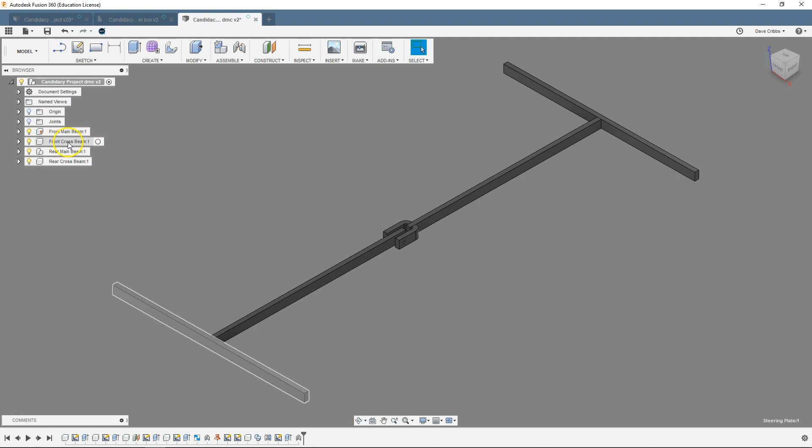First thing we're going to do is work on the wheel boxes. I need some holes in this front crossbeam for those wheel boxes to pivot on. So I'll come here and activate that component, and I can just go ahead and sketch right on that top face.

I want the center line, so I'll do the same trick. I'll slide down until I get the triangle, that's the midpoint, and come out at a certain distance. I'm going to turn that into a construction line. I'll do the letter C for a circle, put that on there, make that 0.5.

I'm going to pull that dimension out so it's a little easier to see. We'll also dimension this distance from the edge here to that circle. We'll say 1.5 inches, that'll have enough metal on the end of this to make it strong enough. Maybe we'll go... we'll call it 1 inch. We'll see how that works out. If we need to change it, we can.

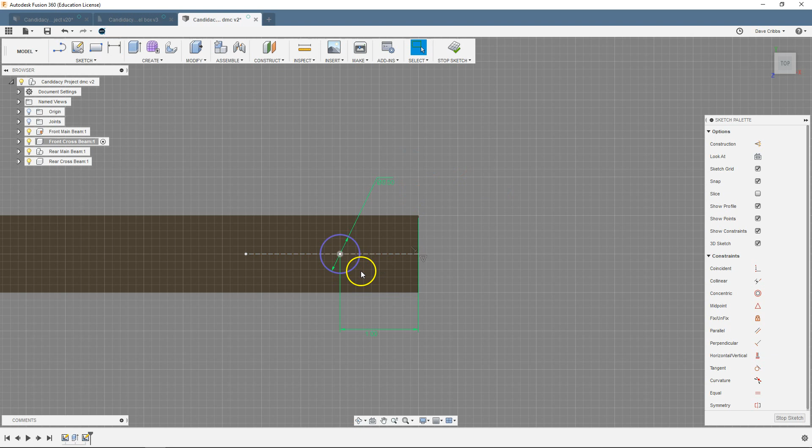So now that I've got that hole, everything is good there. We'll stop that sketch.

Select that profile, we can press... grab the wrong one, select press pull. I'm going to go down so it'll cut. I can go ahead for the distance, select face. I want the face behind this one, so if I hold down my left mouse button I can select this face or the bottom face. Okay, so we can cut that.

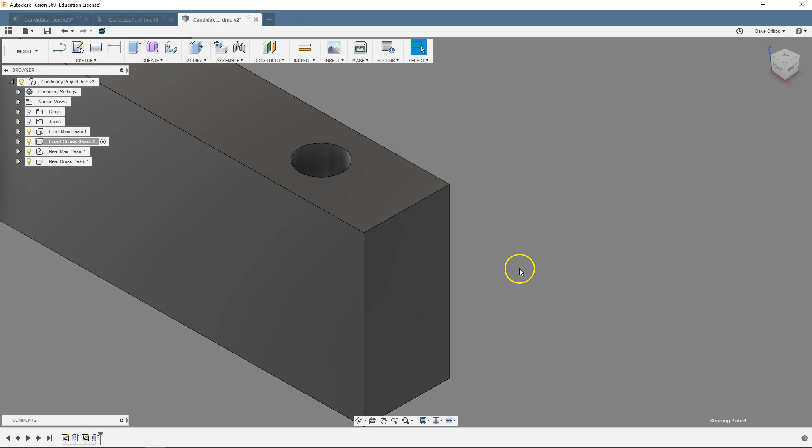Now that I've got that hole, I think this will be a great use of the mirror tool. So we'll pull that up. I don't want a face, I want the feature. I can grab it from down here in the timeline. And since I've obeyed rule number 1 and everything is nice in their folders, the timeline for this front crossbeam

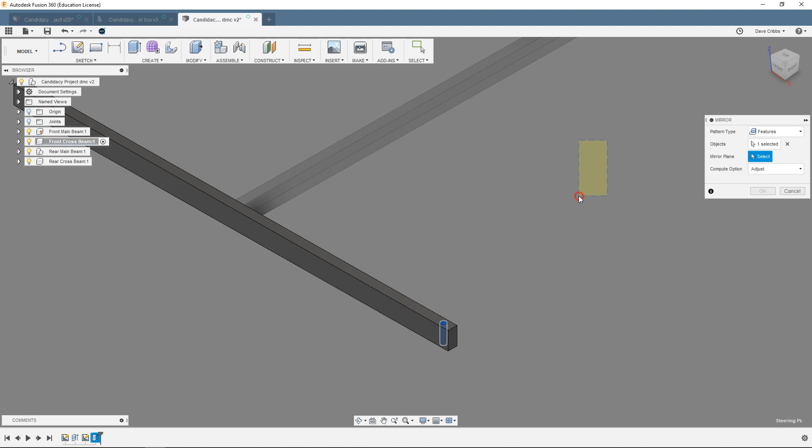is really easy to find what I need. The mirror plane will be the center plane right here. So now I can see I got my other hole right over there. So now I've got the holes for the wheel boxes to pivot in.

So we'll come back up here. I'm going to right click, do a new component, we'll call this our wheel box. And unlike the other component, when I did rear main beam, this is an assembly that's got more than one component in it. This one's got a body. This was its own component, and then I added another one. So that's why this is an assembly.

For the wheel box, I'm not going to actually make any geometry in there. I'm going to come right here, right click again, and do another new component. And now it's going to nest component 7 under the wheel box. The wheel box doesn't have any bodies, so there's nothing actually associated with the wheel box component. These other parts will be.

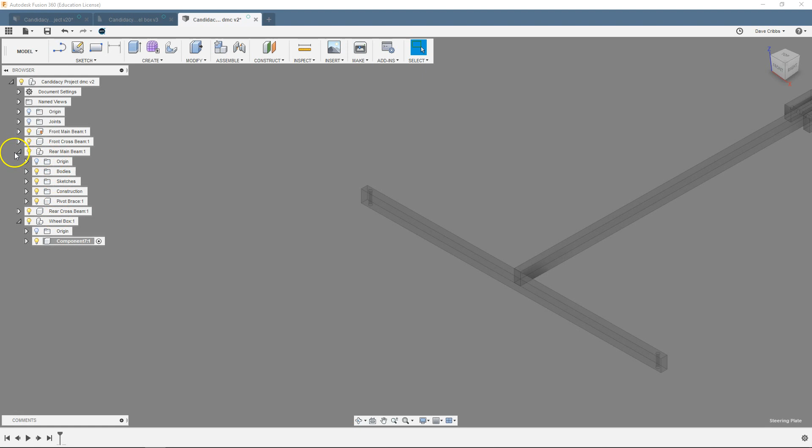Okay, so I've designed several of these pieces in place. I was real careful to put them exactly where I wanted them so I could do the as-built joint. But this time I'm just going to go ahead and design wherever the heck I feel like it. So I'm going to go ahead and sketch.

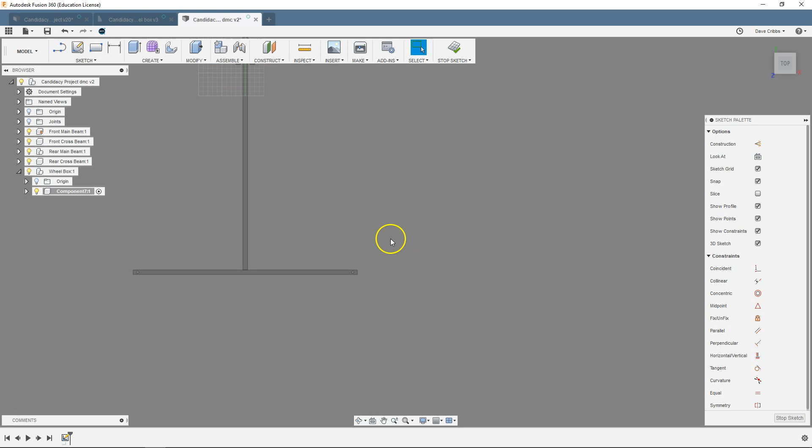I'll grab this plane right here, and I'll put the wheel box close to being out here, but I'm not really going to worry about getting too close. I'm going to sketch a 2-point rectangle, it doesn't have to be attached to anything. It's going to be 2 inches, I think I did about 4.5 inches last time. And once again, this isn't defined as any location, so that's why those lines are still purple.

I am going to want to put a hole in this, so I'll do this to find the midpoint. This time I'll just come all the way across, right click, and make that a construction line. I'll do C for circle, it's one of the few shortcuts I know. 0.5 for that circle, and place it.

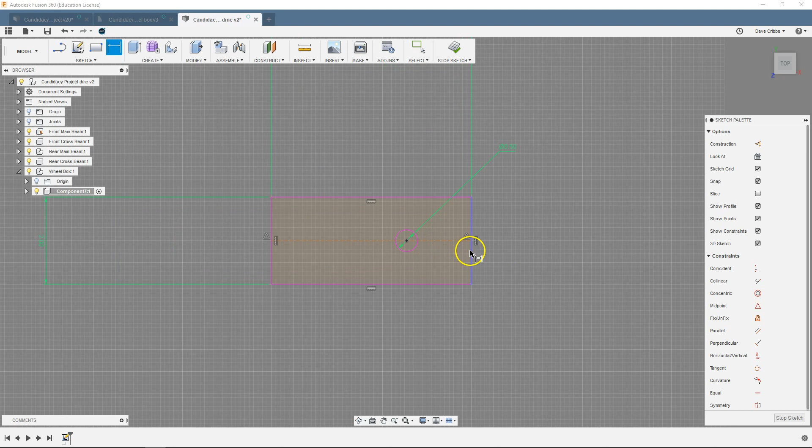And then we'll also add a dimension in from this edge. For the wheel box, we'll go ahead and call that 2 inches. Let me actually look at my drawing.

I have it as 2 inches by 4.5. You don't have to worry about drawings right now, this is just for me. I had 1.5 inches in.

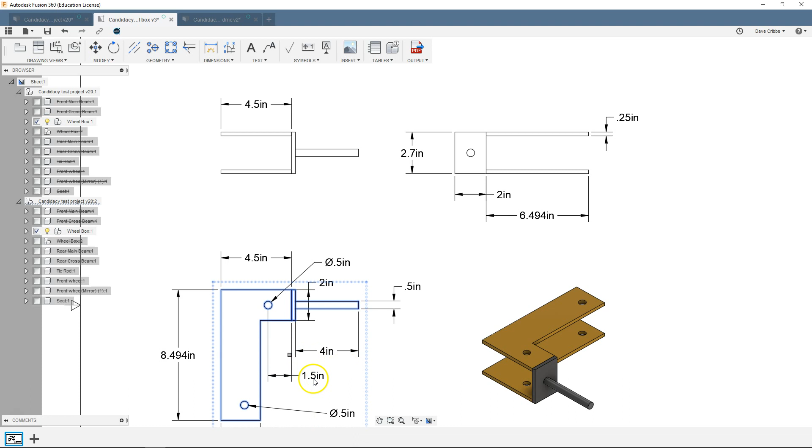I'll post these drawings online so you can get the same dimensions. So let me go back here, and it's just easy enough to change that to 1.5. So we'll go ahead and stop that sketch.

Go back to perspective view, right click, and we'll make that just a quarter inch thick. On the other drawing I had this big long back plate on it. If you look at both of these, the bottom part of this one is connected to our tie rod. This top one, you don't really need that, so I'll just make it that nice little rectangle.

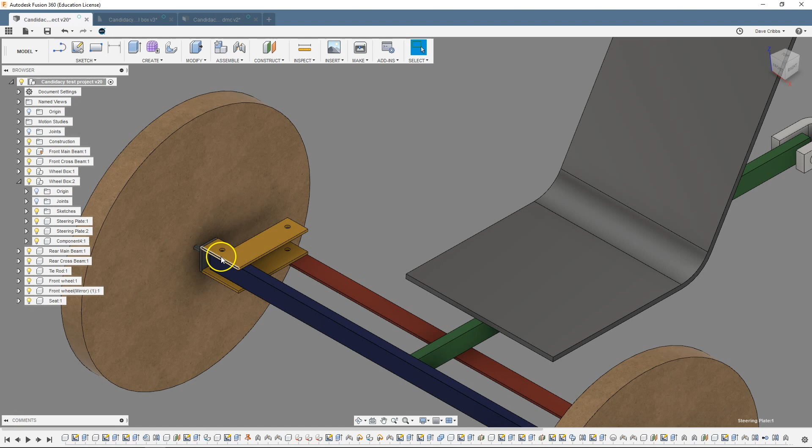Okay, so that's one part. I need the other front part. So this will be the top plate. So we'll go ahead and name that top plate.

Go back up to the wheel box. I'm going to create a new component. And this will be the end plate and shaft that our tire will sit on, or our wheel.

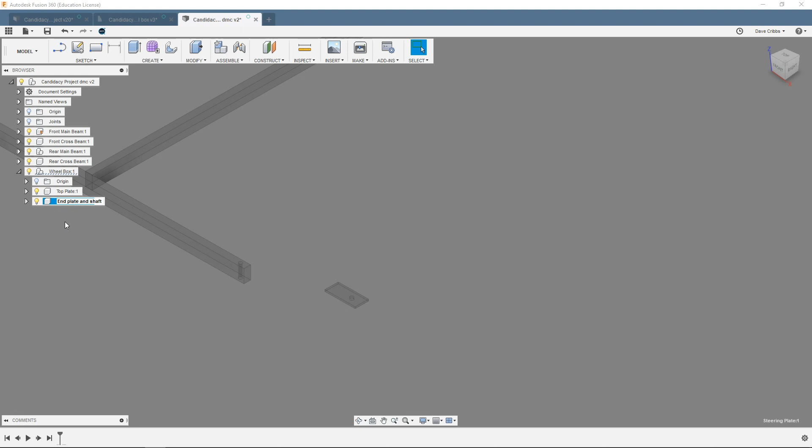Okay, so I can sketch that. I do know I want it on the right hand plane, so I'll come out here, select this plane. Same thing, I'll sketch this as a 2-point rectangle.

Let me come back to my drawing. That end plate was 2 inches by 2.7. And this will be a good example, I'm going to change that. We'll leave this. Let me dimension this.

That's 2 inches. I'm going to do this. That's 2.5. And I'll explain why I did that here in a second.

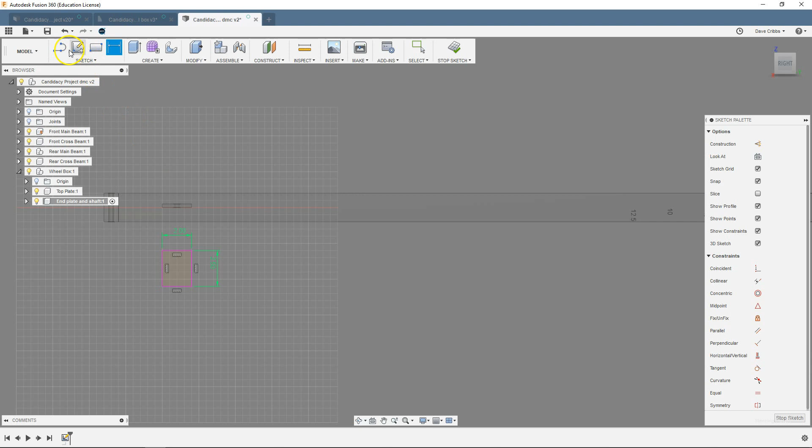I also need to put, I'm going to put a center line on here. Not just here in the vertical, but I'll also put a center line on the horizontal. And that's where I'm going to make sure that my axis of my shaft goes. I'm going to turn this into a normal line and this into a construction line, not a normal line.

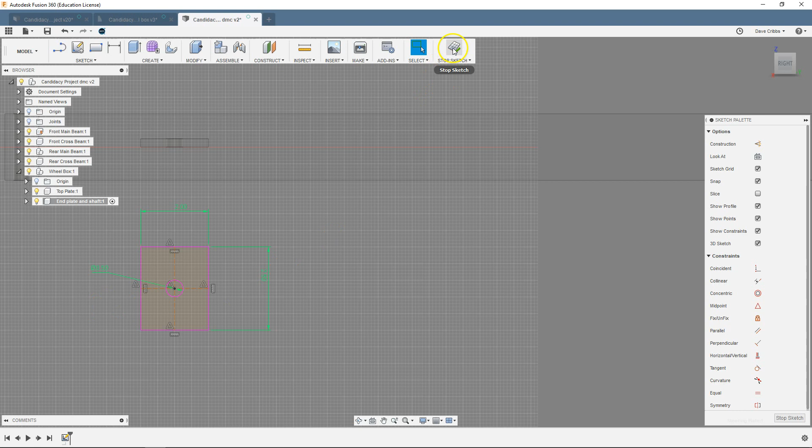So I'll do C for circle, put it right there at the center, and we'll say a 0.5 inch shaft. Okay, so that should be the geometry I need for the end plate. So we'll stop that sketch.

Come back over here, and this is kind of an odd place. I'm going to turn off the front crossbeam, just so it's not in my way.

I'm going to extrude this and the center part. So I'll open up the extrude command, get both of those. We'll pull out 0.25. I still need that sketch, so I'm going to turn it back on. Left click, and I can grab that profile.

I'm going to right click and press pull. I want that to be, I don't want to cut, I want to join. And our wheels are pretty thick, so we'll go ahead and make this...

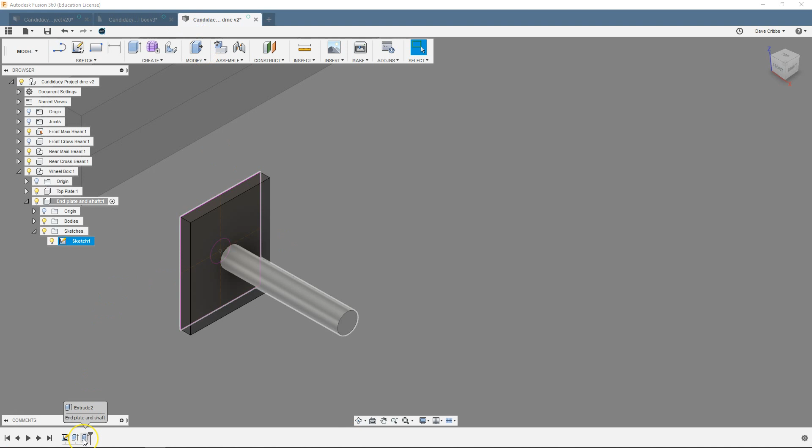I don't know, let me see what I did over here. I did it 6.5 inches. So we'll go ahead, oops, I already did it for me. We'll edit that, I want this to be 6.5 inches. Okay, so I can turn off that sketch.

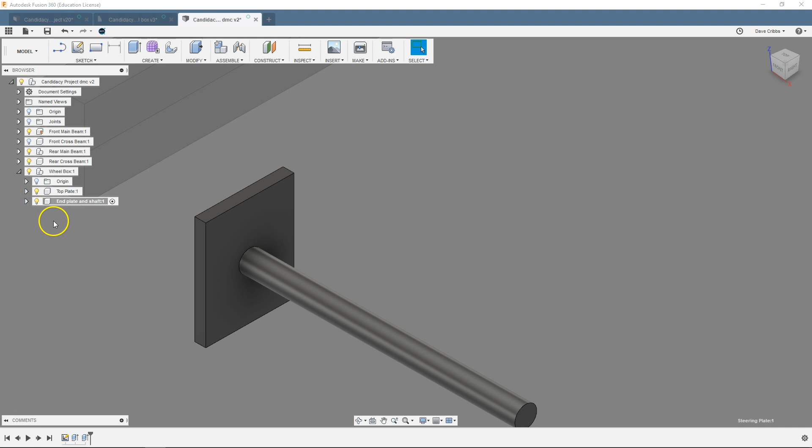So this is all one body, but it's under the end plate and shaft. So that should be good. Okay, so now that we've got the end plate and shaft completed, now we can go ahead and make the bottom plate.

So I will need to activate this component, do a new component in there, call this the bottom plate. Same thing, we'll sketch. The bottom plate's going to be on this same plane.

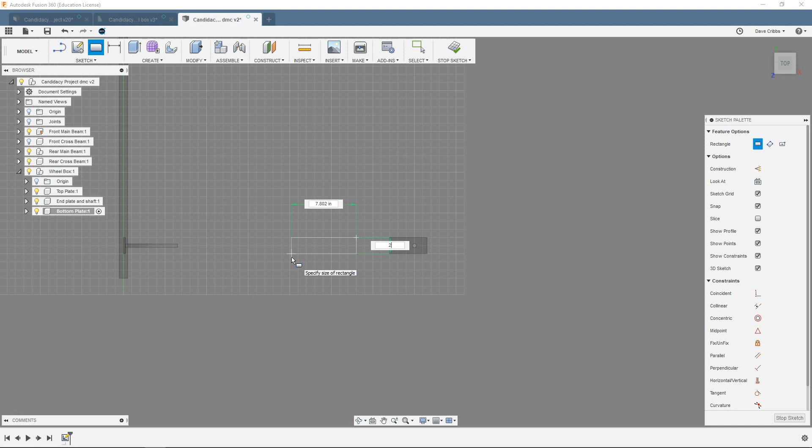I'll just do a little close by. So this time, we can do this. Let's go ahead, we'll do the same 2-inch by 4.5 rectangle.

But then not only do we have this 2-inch by 4.5, but we got another 8.5 by 2.5 hanging off this end. So I'll go ahead and I'll make another rectangle on this corner.

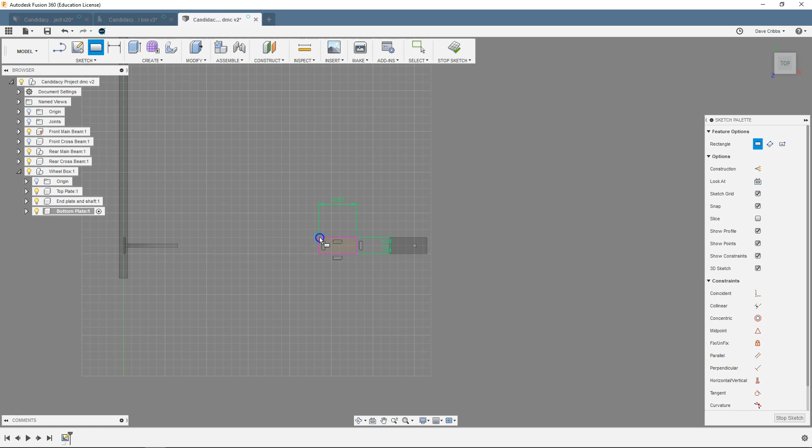So that was 2.5, and if it's 8.5, and I've already got 2, so that'd be 6.5. Place that.

I've got dimensions all over the place. I kind of move these a little bit. Move the dimensions. Okay, so I've got 2 rectangles.

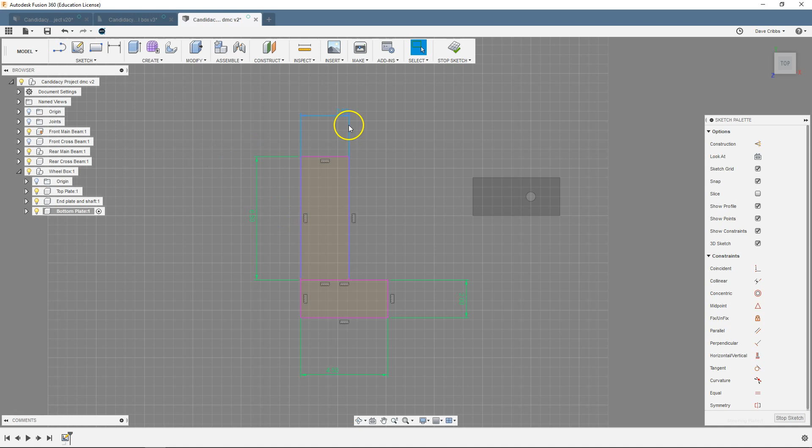I can just leave that. I can come in here to my sketch tools and grab trim and delete that line so that's just one continual space. I'm going to leave them as rectangles because if I need to come in and change the geometry, I'd rather have them as rectangles so I can adjust that.

I'm going to put my midpoint line once again right here, so my circle's in the middle of that plate. Change that to a construction line. I'll do another midpoint line on here.

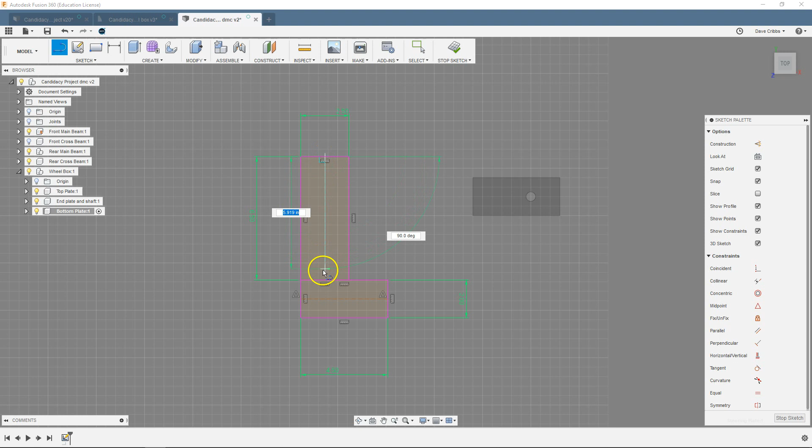Change that to a construction line. We'll need a couple circles. We'll need a 0.5 circle there. We'll need a 0.5 circle. Need a 0.5 circle on this piece as well. Put it.

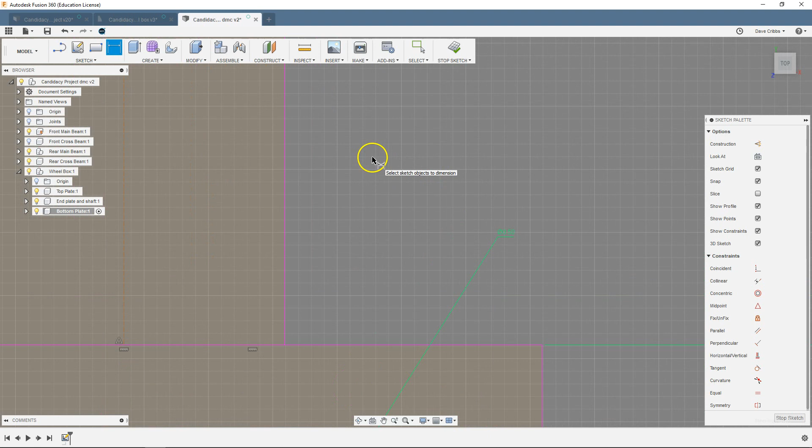Fusion likes to be difficult sometimes. You just gotta hang in there. Okay, so that's a 0.5. We'll move this guy here so I can see that.

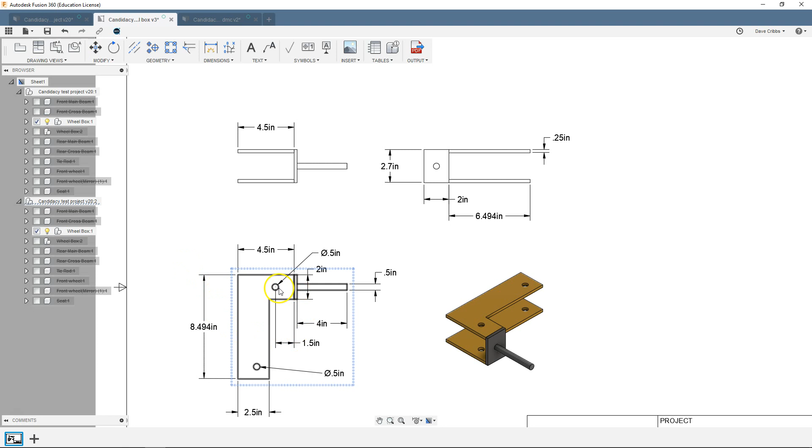Same thing, we'll dimension from this end out to where the hole is. Put 1.5, I can't remember what it was. I go back to my drawing. Oh, 1.5 from the end. Lucky me. And then this guy, I didn't have a dimension on this one. We'll leave this guy without a dimension right now. That's going to come into play with our Ackermann steering.

Okay, so that should be good. We'll stop that sketch. Come back to the isometric view. Go ahead and start my extrude command. Grab this one and this one. We'll go at 0.25. We'll make our plate.

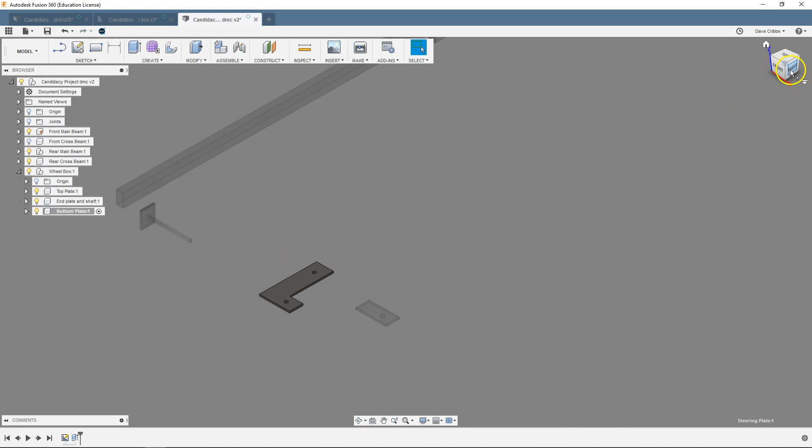Okay, so I can come around. I'm going to do this. I'm going to move these a little bit closer so we can kind of see what we're talking about. That's the big one, so that's the bottom plate, and this is the smaller one. So that's the top plate.

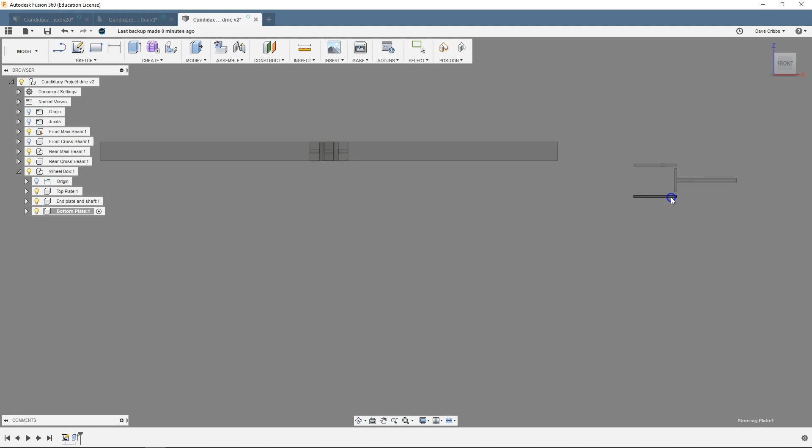I'm going to change my view to the front. Slide that over here. Slide that over there. Go back the other way. Okay. So when I look at this part, I can go back here to the wheel box, activate all of it. And we can see all these parts.

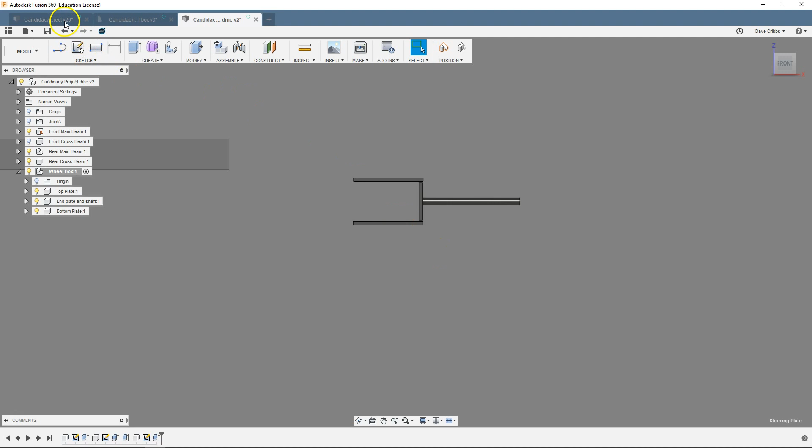And the question is, when I design this, when I actually build this, do I want to assemble it with this top plate and the bottom plate fabricated like that, or do I want to put the top plate on top and the bottom plate on bottom? And it turns out this is going to be the case that I want to do it. In my original drawing, my original design, you can see that I've got the top and bottom plates coming off the ends. They're kind of sideways. This top face is open.

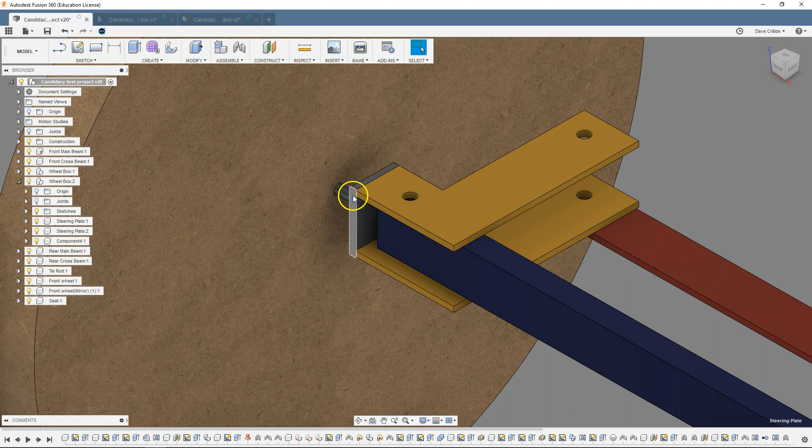And that's actually going to be a weaker joint. We'll have to weld that together, and then the entire weight of the wheel is going to be on that weld. And our welds are not always perfect, so we want to help ourselves out as much as we can. So if I design it this way, then just the actual physical location of these two pieces, the load can be transferred into that just because of the position, and the weld will hold it where it is, but the weld doesn't have to hold all the weight.

So when I join these things together, I want to join it in this position rather than like that. That will be weaker, and that will be stronger. So we'll go ahead, come back here. I'm going to go ahead and capture position. If I go back to revert, it'll put these things back all over the place. So I'll capture the position.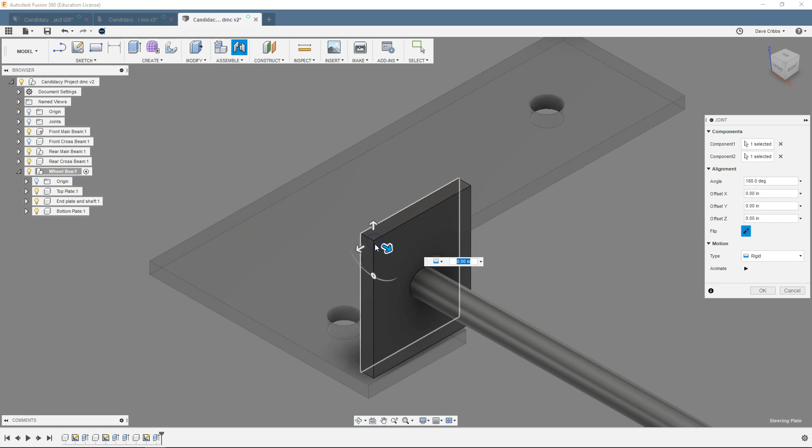Now I can do the joints. And since I kind of put them close to each other, I'm going to hold down Control, grab that bottom corner, hold down Control, grab that top corner. I want those to be rigid, and I want to flip that. Okay. And then same thing.

I'm going to right click. It's called a context menu. I'm going to right click and drag straight up and go to repeat joint. I don't have to go get the command. So I'm going to grab this corner and Control, grab that front corner, flip it again, and those are good.

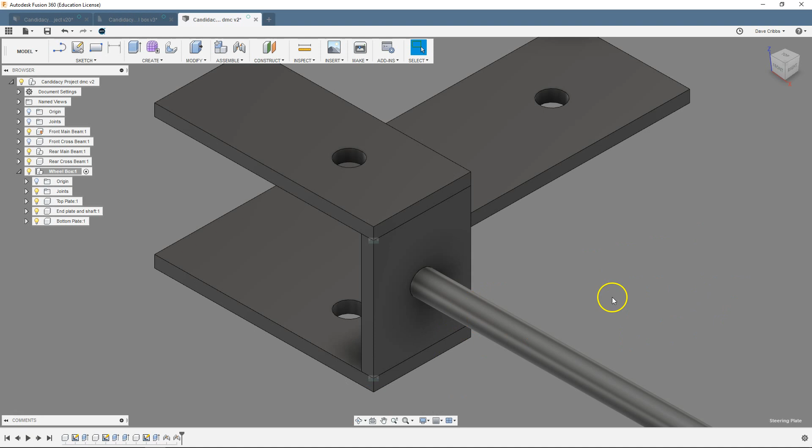So now I've joined together all parts of that wheel box, and we got a completed wheel box. That should be good. We'll see. So now I can go to fit, turn back on my front crossbeam. Panicked there for a second, couldn't find it.

And now let's go ahead. We're going to need another one of these. I'm going to turn off my joints. We need another one of these for the other side. So I'm going to select this entire...

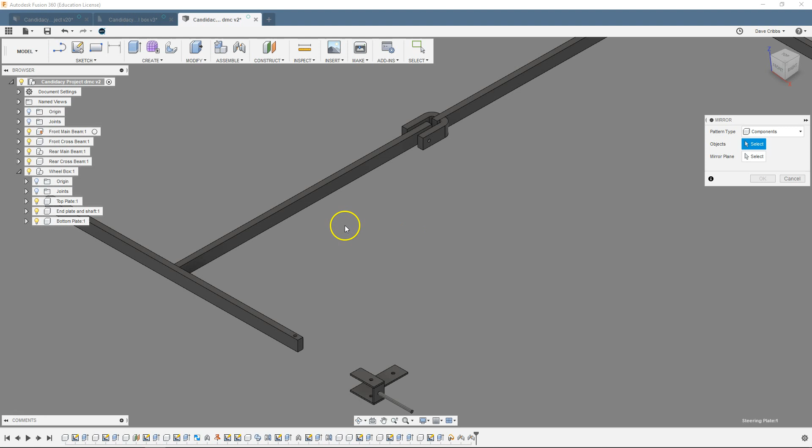Let me see if it'll let me mirror it. I'm not sure. Create a mirror. See, this just says features, components. I don't know if I can do an assembly. We'll see if it lets me mirror a whole assembly. Oh, there you go. Well, that was easy.

Okay, so that's the other assembly. That looks the way that I want it to. So we'll select OK. And great, so I've got wheel box 1 over here on the right hand side, and I got wheel box 2 as a mirror over there on the left hand side. If I expand this, it's got my components inside of there.

That worked out fantastic. Since I joined this wheel box, the joints are in this folder rather than my main folder, so it makes it a little bit cleaner. Now I can go ahead with the main level activated, so I'm going to go ahead and assemble these joints. Oop, here we go.

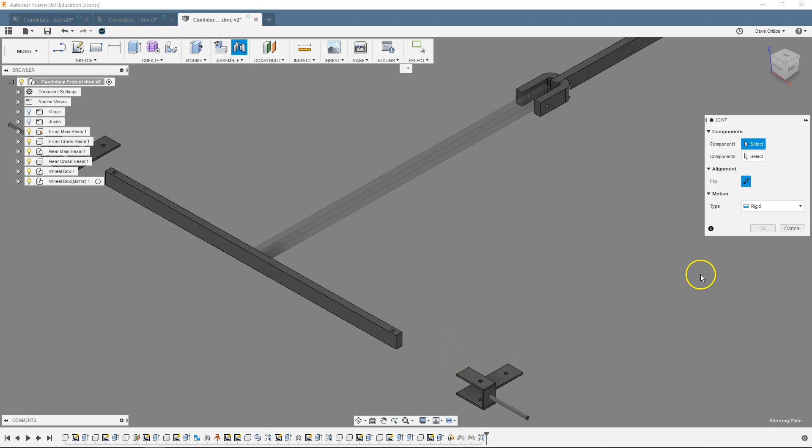We're going to get stuck again. I want to put a revolute joint in here. If I select the center of this, and come back out here and select, I can hit Control and grab the bottom corner. It'll make a really nice revolute joint. It'll look great. We'll say OK, and go back to fit.

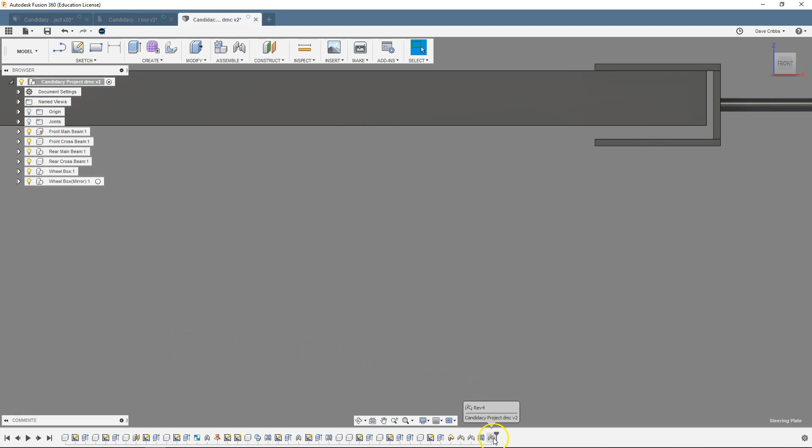But the problem is when I look at this joint, there's no longer that 0.1 gap. I need to have this scooted up a little bit, so we'll go ahead and change that joint. The way we fix that joint, we'll come down here and edit the joint, and we've got the option of doing an offset in the X, Y, or Z. So in the Z direction, we'll just move it up by 0.1, and hit OK.

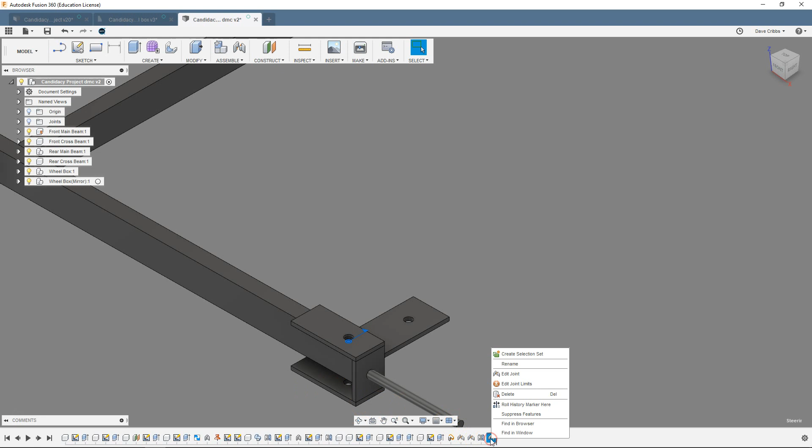And nothing happened. Let me see. Edit joint. Oh, so I moved the beam up 0.1. So then I'll change that to negative 0.1, move the beam down. So now if we take a look at that...

There you go. So I've got that 0.1 gap, and now this is too big. So this frame should be 2 inches tall, and then 0.1, and 0.1 should be 2.2. So the height of this should be 2.2.

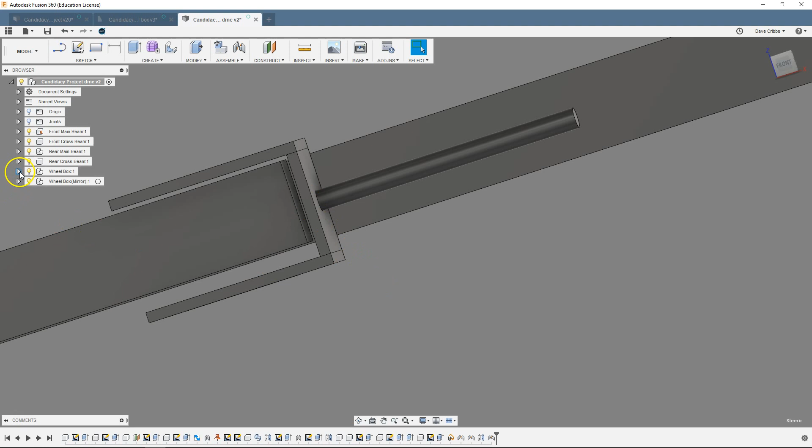So we can come back in here to our wheel box, come in here to the end plate, come in here to the sketch where I designed it. We'll edit that sketch. And I called it 2.5, and it should have been 2.2.

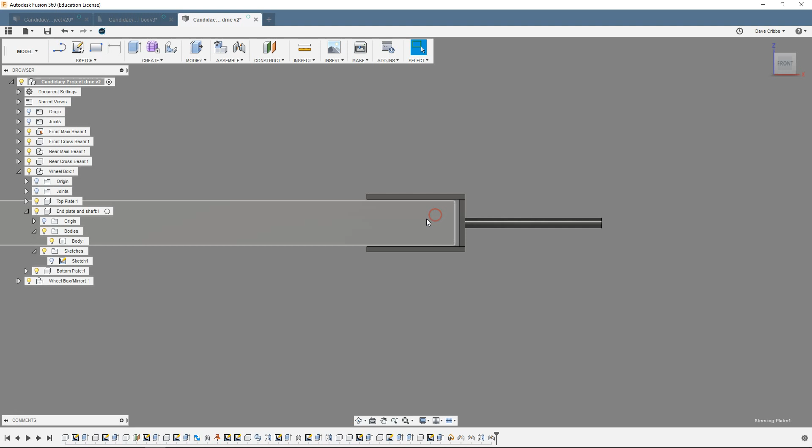So hopefully with the magic of Fusion, when I come in here to look at this... there we go. I'll go back to the front side and zoom in. There you go. So I changed this to the correct height. Now I've got a 0.1 gap on top and a 0.1 gap on the bottom.

So that wheel box is jointed correctly. I can grab it, and it's going to pivot. That's excellent. I'm going to go back here and revert that one.

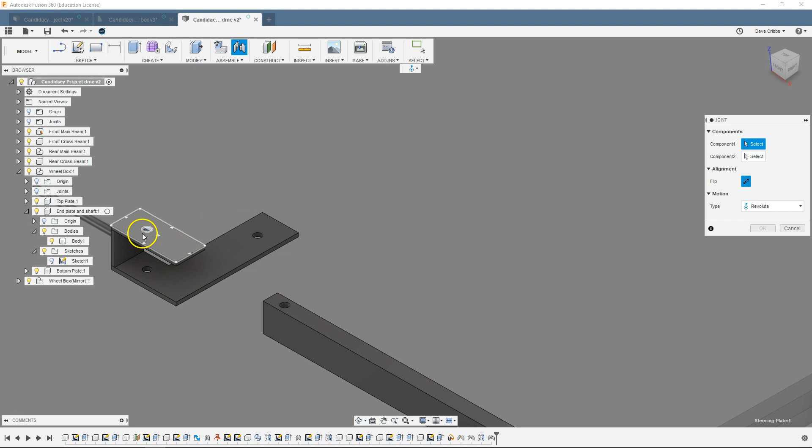I'll come over here to this one, and I'll joint this one as well. So select the joint command, come in here and grab this, hit Control to grab the bottom. Come over here, hit Control and grab the top.

And I want to scoot this one. The first thing you select moves to the second, so this one I'll need to move up this one, 0.1. That's that Z offset again. Oop, and I forgot to...

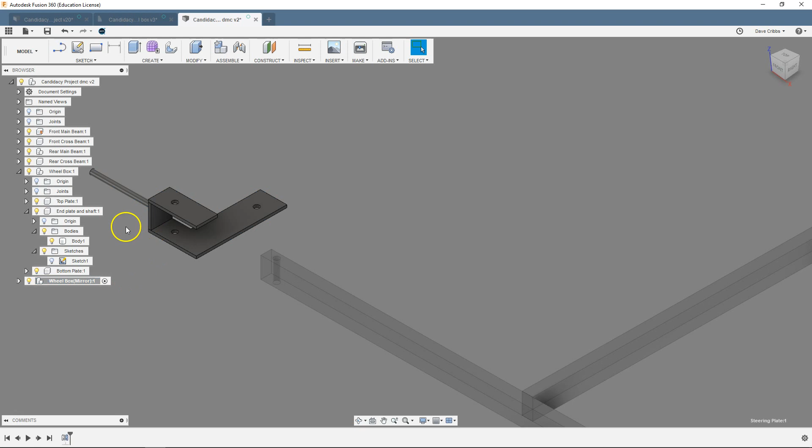So I copied the wheel box, but it did not copy the joints, so we'll have to undo that joint. So all the things in wheel box number 2, the mirror, are not jointed together. We'll go ahead and do that real quick.

So I can go ahead, we'll do this since they're all in the right positions. I'll create a rigid group where I just select 1, 2, 3. Hit OK, and now they are all locked together. Put this back in position. So that's a little bit faster than even jointing it or doing the joint in place.

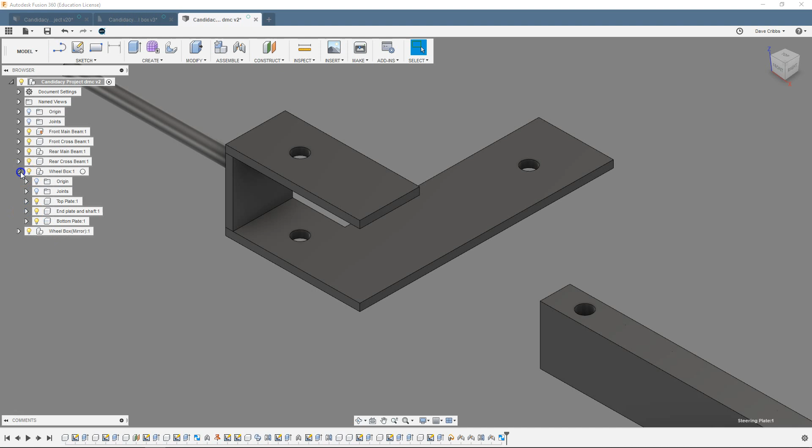So now for this, I'll go back up to my main level. Let me close some of these things out of the way so they're not in my... way. So we'll do a joint. I want to do the revolute. I want to grab the bottom of this.

Bottom of that plate, top of this beam. I'm still going to do the Z-axis offset of 0.1. Okay, so now it's over there. And if I move this bar, that moves.

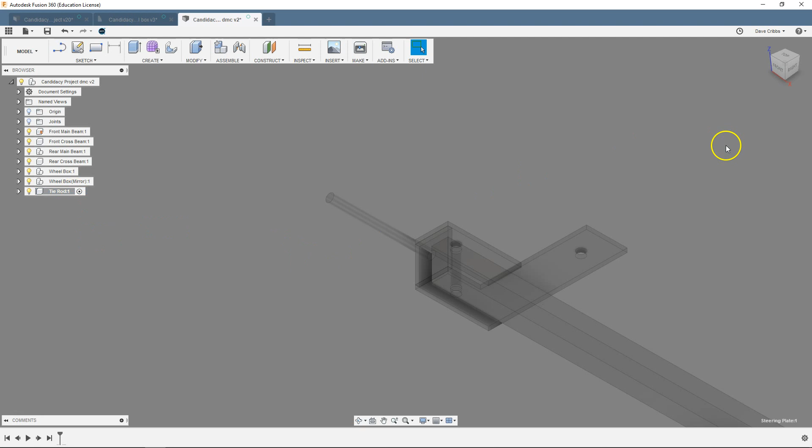Okay, so the last thing I need to do is put the tie rod in. I'm just going to use a flat plate to do that, just because it's going to be easier. So I'll put the flat plate on top of these things. So I'll just use, I should go ahead, I should, instead of sketching right on here, I should move it up a little bit.

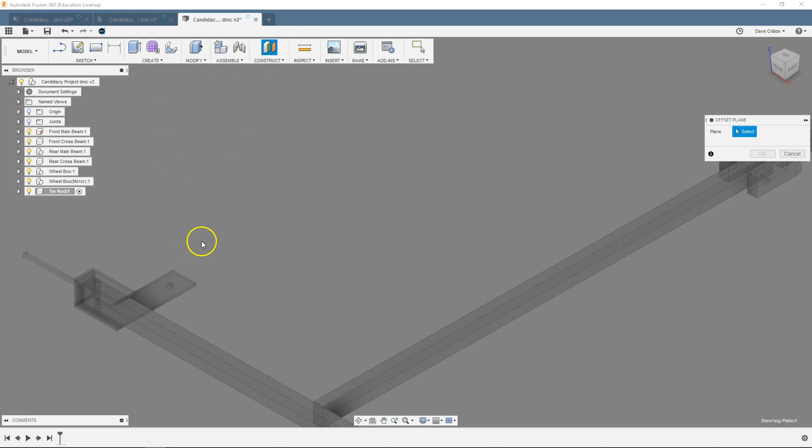So same thing, we'll do that offset plane from that top face, we'll come up 0.1 again. Okay, and I can sketch on that plane. And this time I'm going to sketch right on top of my geometry. I'm going to go from here all the way over, and we'll use a 2-inch height, and then we'll leave that 45. Make sure it's on the line. There you go.

I put these holes in here, but I'm not going to attach those to those holes just yet. We'll talk about why here in just a second.

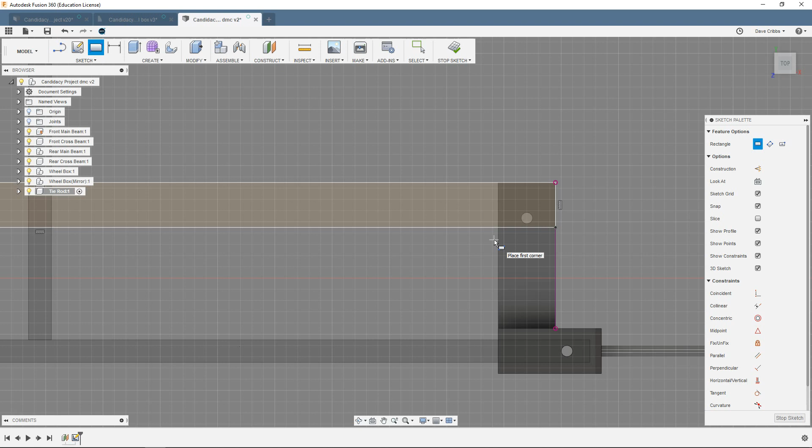I will stop this sketch, go to my isometric. This is on top, so I'm going to press pull this and we'll move it up 1/4 of an inch. So that's the last part of my steering assembly.

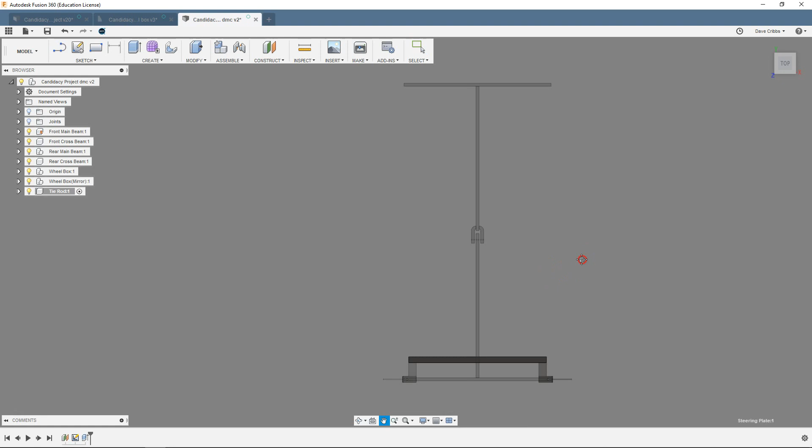I need to link these together. But the idea behind the Ackermann steering, which is one of the reasons why we're talking about this, is that when I move - you can go back to the one I've completed - that when I move this wheel assembly, when I move that tie rod, the inside wheel moves more than the other.

So this is the kingpin, that's what would go in this hole, to this axle. The line made by these 2 points, for the easy way to do Ackermann steering, that line needs to meet right back here at the center of that axle. So that's what's going to determine where that circle goes.

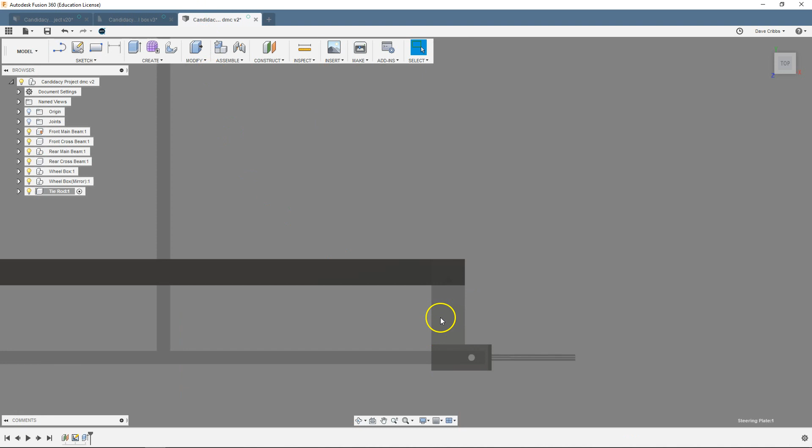So on ours, I've got a circle in here on that piece below it, but I'm going to need to adjust that circle. I think I'm actually going to double click this, and I'm going to move this. I changed my mind.

I do want this underneath, so I'm going to move it down. I'm going to move it down -0.1 from the sketch plane, move it down 1/4 inch for the thickness of the other flange, and then another -0.1.

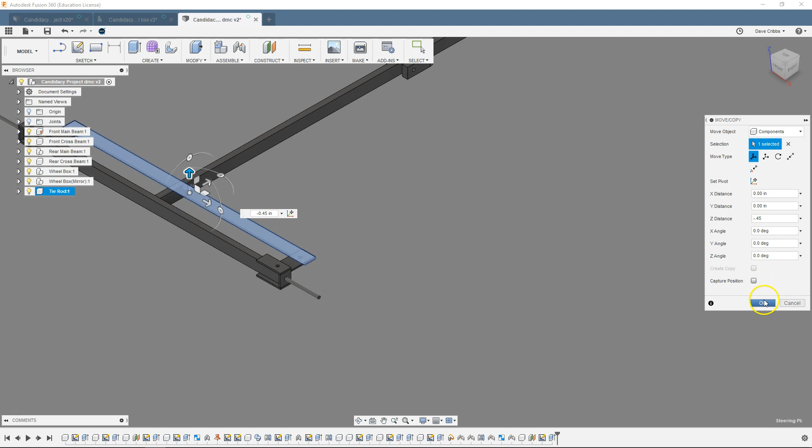So if I'm lucky, that should be -0.45, and that should be the correct position. So instead of being 0.1 above it - nope, I was wrong. Okay.

So I'm going to move it out of the way. I'm going to measure this piece. That's 0.25. Oh, this is also 0.25 thick. So instead of going off the bottom, I'm going off the top. So maybe I should move it 0.7.

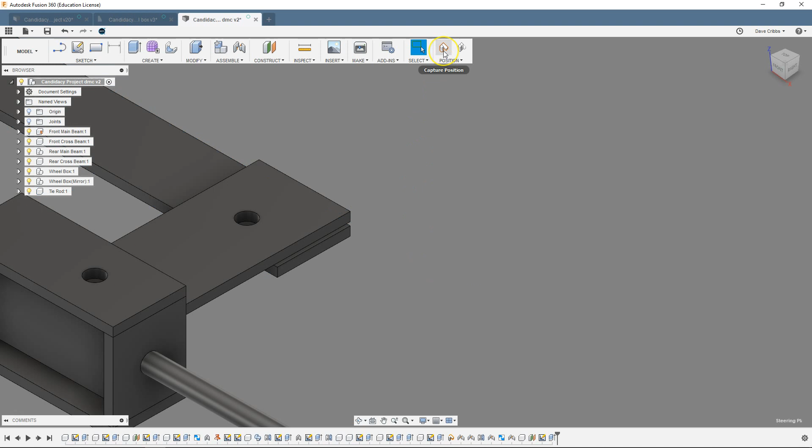We'll go back to this piece. We'll move it, and the -z distance will be the 0.25 for both of them and the 0.1 for both of them, so it should be -0.7. That looks better. And then I'm going to capture that position so it locks that move in.

So now I'm going to go over here to the top. We'll sketch this, fit it in so we can see everything. It's not going to be a sketch we're going to do any geometry with, but I'm going to create a sketch. We'll start on this top plane right here.

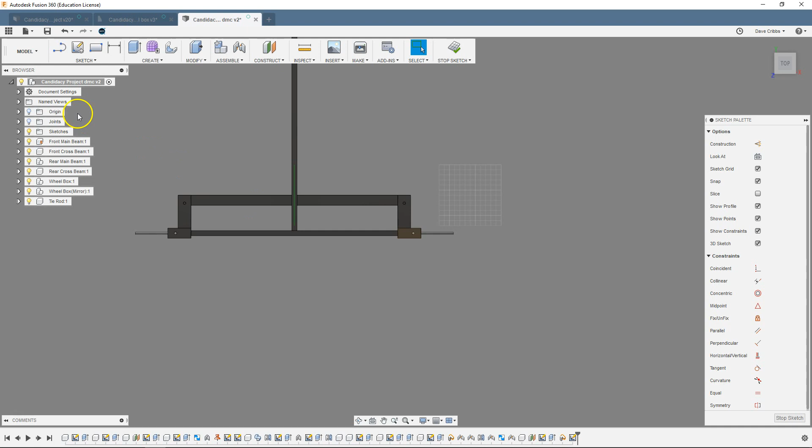I'm going to draw a line from the center of this pivot. That's where our kingpin goes. And I'm going to zoom all the way out.

Center of that hole, all the way back here. I didn't put a point, but I can use the grid to find the center line. I can also use the grid to find the middle of that thing.

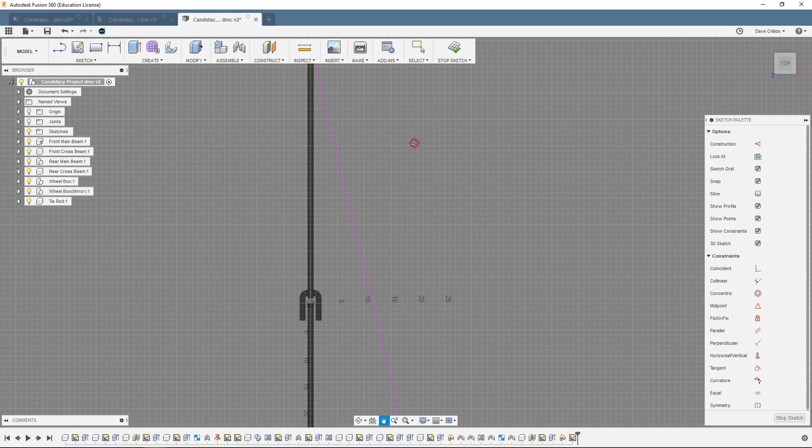So that's the line, that's the line from this kingpin back to that point. So we can see that this pin right here is in the wrong spot.

So we'll go ahead and have to move that over. I can go back here, find those dimensions and scoot it over to the right or to the left.

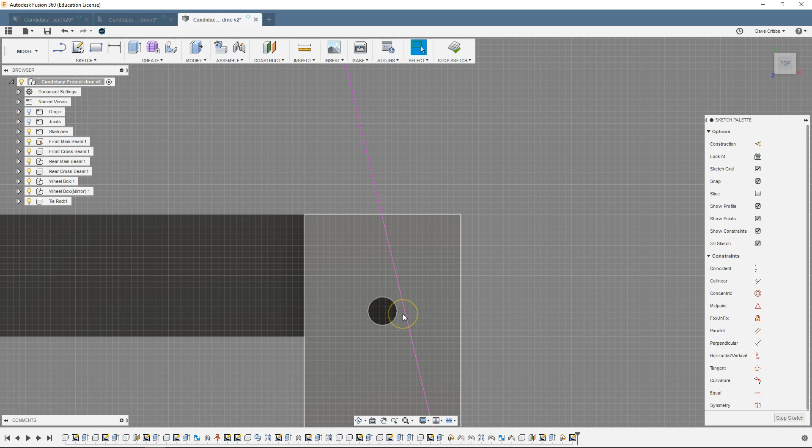This sketch with this line on it, I should actually create that sketch on this part so I can use this line to adjust my geometry. So I'm going to undo that line.

It's this part right here where that hole is. So I'm going to go back. That's my bottom plate. So I'm going to go into this bottom plate, open up that sketch, because that's the sketch where I defined that hole in the first place.

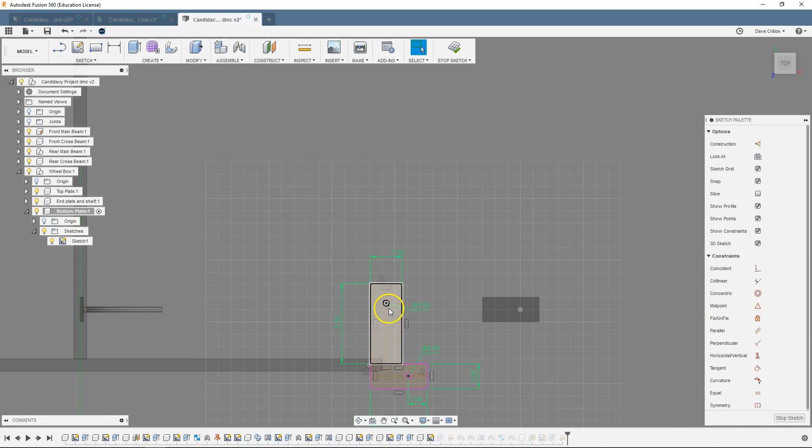I'm going to have to zoom out. Right here, that hole - we want to move that hole so it's on that other line. So I'll redraw that line in this sketch, and this is what will determine our Ackerman steering.

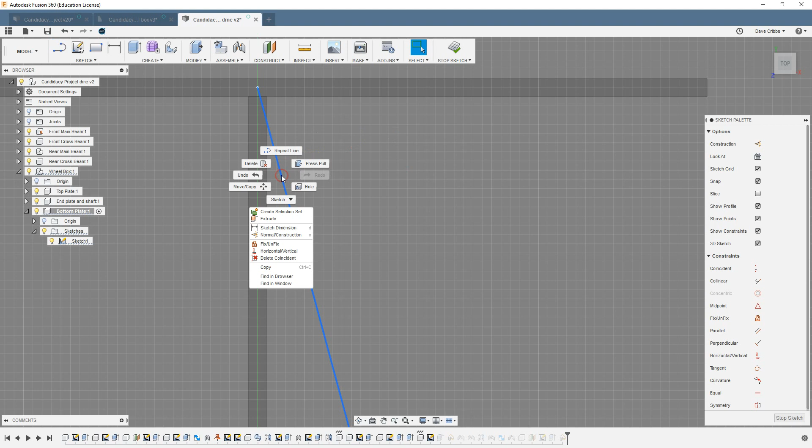I'll come back and use the grid, put it right there. We'll make this a construction line. I should really go back to this and find the midpoint, but this video is already long enough. So I go back to the top.

And I'm going to slide this circle. It's already on the midpoint. I'm going to - oh gosh.

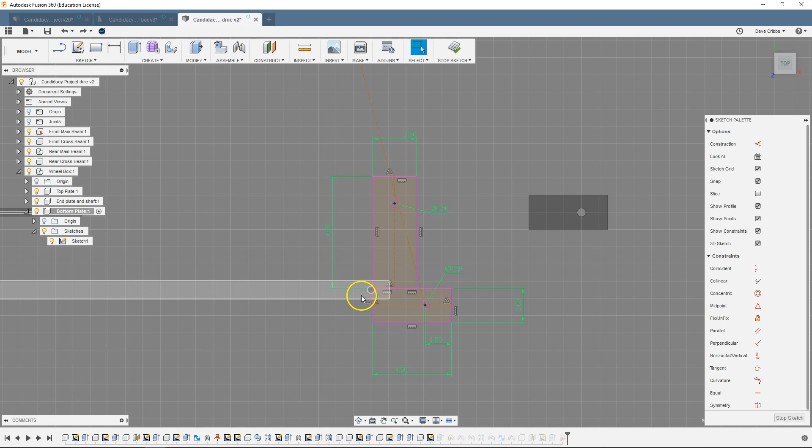Okay, so this sketch was out in space. This sketch was not overlapping, so this geometry is not going to line up. Let me go ahead and fix this. I think if I move these, they'll all move.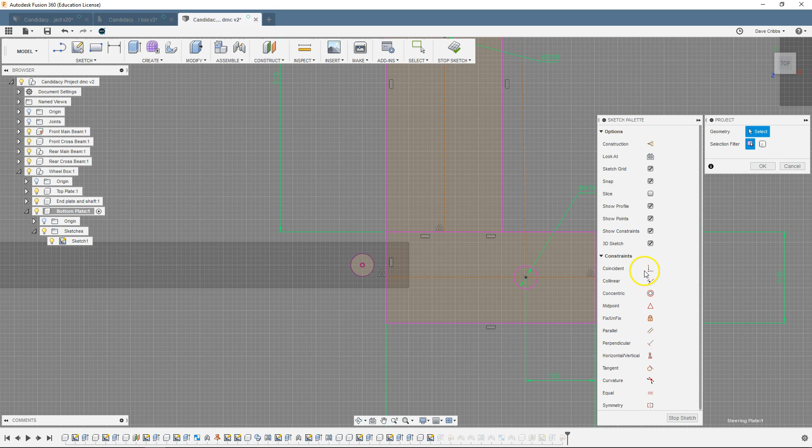I'm going to project, letter P. I want this circle to be coincident, I want this circle to be over top of this circle. That's the way that they're joined up in real life. So now I've made that actually where it is in the part.

So now I can go back here and grab this point. Oh, come on. And same thing - move this guy back over here. We'll put him on the midpoint.

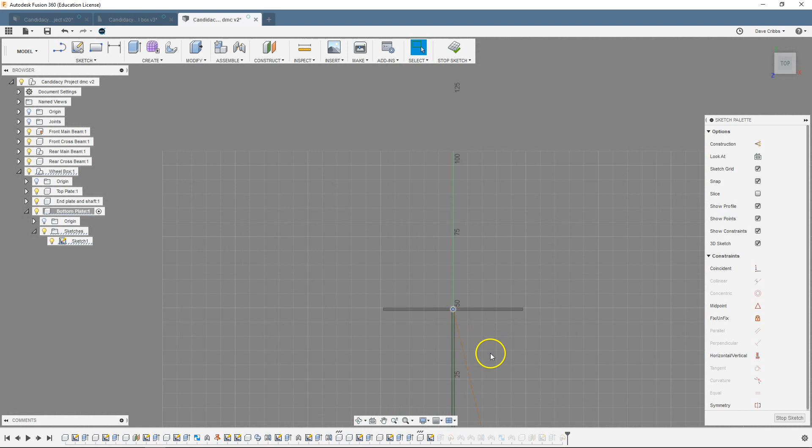So now when I zoom out, we can see that for this circle, it's going to be all the way back here. So this plate is not actually big enough. If we want to put it on the center, this plate's not big enough. We can either move this plate over, or we can make the plate longer.

The longer we put this out, the more leverage we'll get. The more we put it over in the center, the more torque it's going to take to do our steering. So we'll do a little bit of both - we'll make this 3 inches. We'll take ourselves some more room.

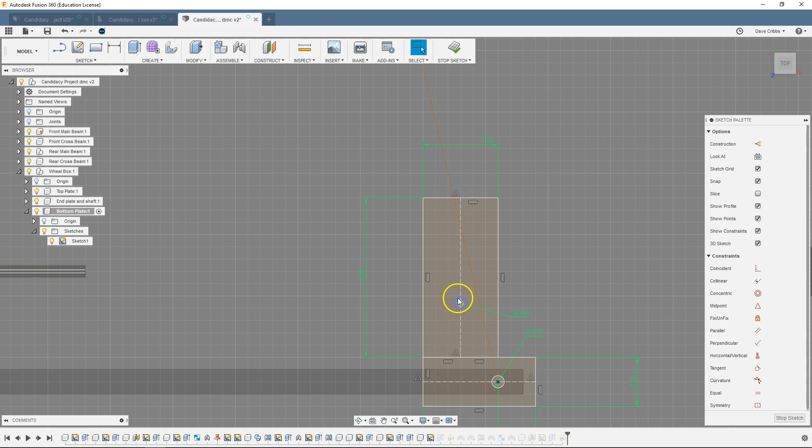Instead of this circle, I guess we can just slide it back now. I just made it thicker. So I want this circle to be coincident to this line as well, so it's going to move it to that intersection.

So now this steering joint is on line from the kingpin back to the back axle. That's the correct location for that hole - the proper place that we need that hole for it to line up.

We'll have to do the same thing. Nope, because when I did this as a mirror, when I moved that circle, I moved this circle as well.

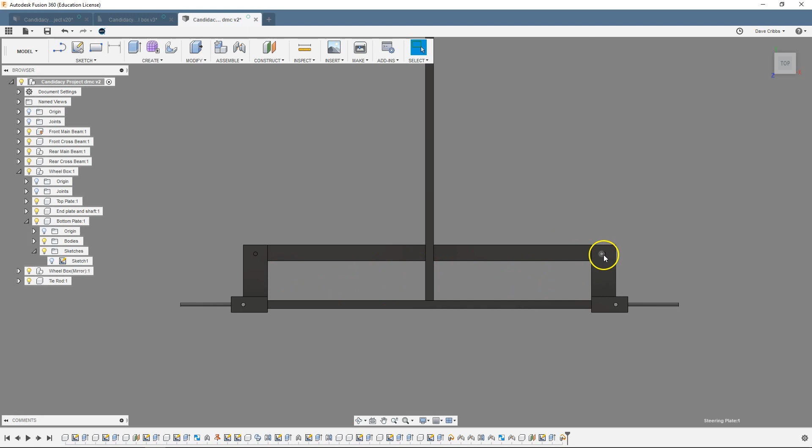So I'm going to come into this part, my tie rod. I'm going to activate that. I'm going to use this circle - tie rod. I need to put some holes in that tie rod so I can joint those things together. I'm going to come back to my sketch. This hole is now in the correct location.

So I'm going to do a circle, and it's going to see the other hole. Oh, it wants the center. My bad. Control Z out of that.

Circle - I can do a 2-point circle. 1 point there. Well, I gotta get the side. Sorry about that, folks.

So let me go ahead, I'll hit P for project, and I'll just project that circle on here, and then I can use the circle command. Say OK. Use the circle command and just do center point - and that's my 1/2 inch circle.

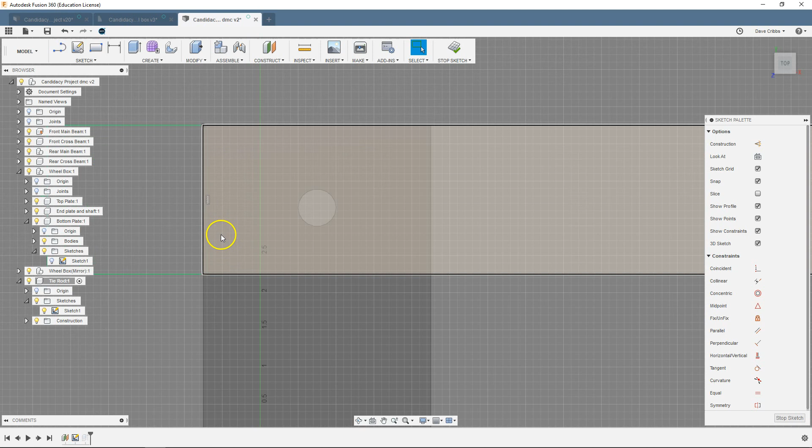Same thing over here on the other side. I'm going to do P for project. Now that that purple circle's on there, I can use it. I can probably just use it just like it is - I probably didn't need to make a second circle on top of there.

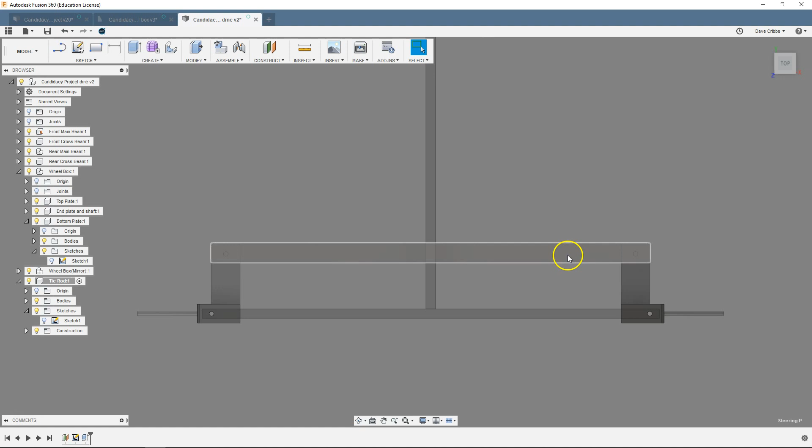So we'll stop that sketch. Oh, I do - I need to turn the sketch on. Thank you very much. So now I can grab that geometry.

I'm going to turn off both wheel boxes. Oh, not the... yeah, turn off both wheel boxes. I'm not sure why it's not letting me grab that circle.

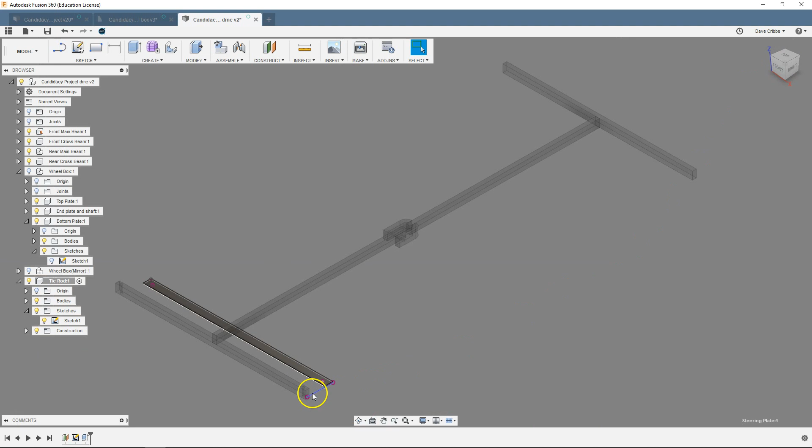I wanted to put a hole on there. Let me go back to the isometric and see where that sketch is. So it's on the bottom circle. So let me left click and hold, do that profile, right click. I have to go up this way.

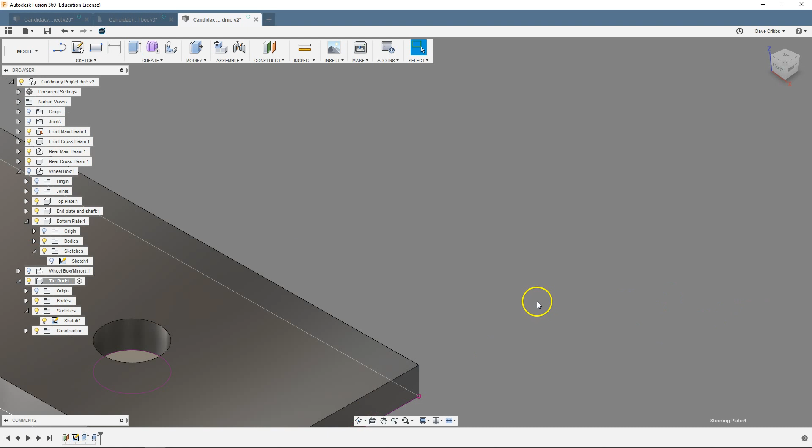And it's 0.25 inches, so I can go distance to this surface. There's that hole. Whoops, trying to move - come over here.

This one's on the bottom as well. Left click and hold, press pull up to the surface. There we go. So now we've got holes in our tie rod.

Turn back on our wheel boxes, the visibility. Go up to our main level. Turn off that sketch, close these down. So now I can do the joint.

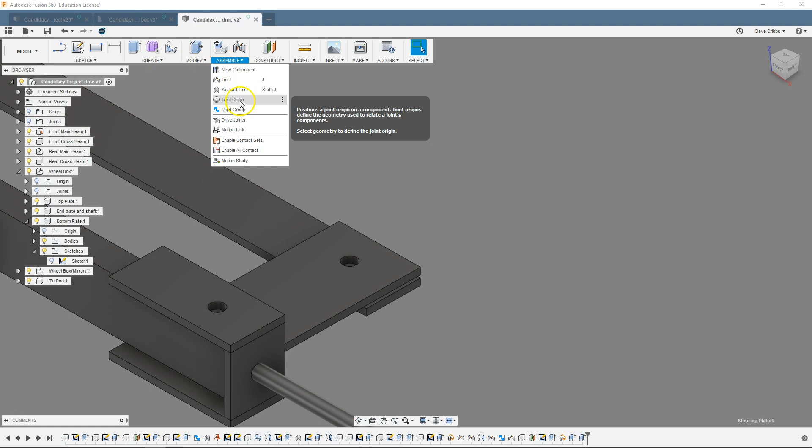Let's see if we can do the as-built on this component and this component to revolute around this hole. There you go, I'm okay with that.

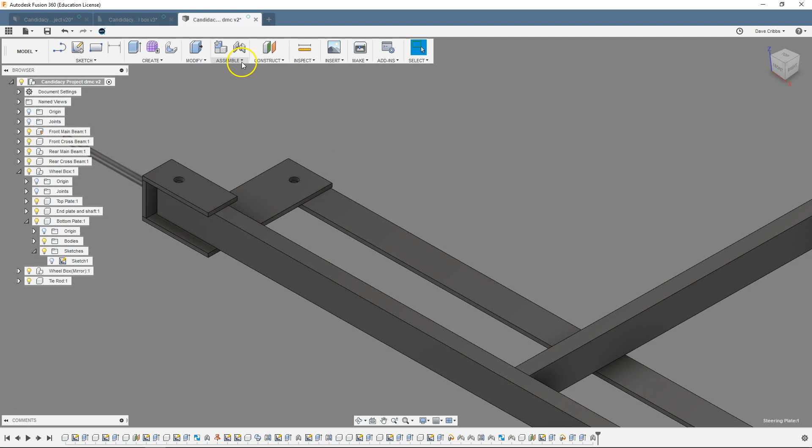Come over here, do the same thing on this side. As-built joint - this component and this component, about that hole. There we go.

So if we are lucky, and I grab my steering, they both move. Fantastic. Okay, and that's an example of the Ackerman steering.

So we'll go ahead and end this video. The third one we'll put on the wheels and the seat. We'll do another loft, and we'll talk about the motion study, some appearances, and some of the component analysis.